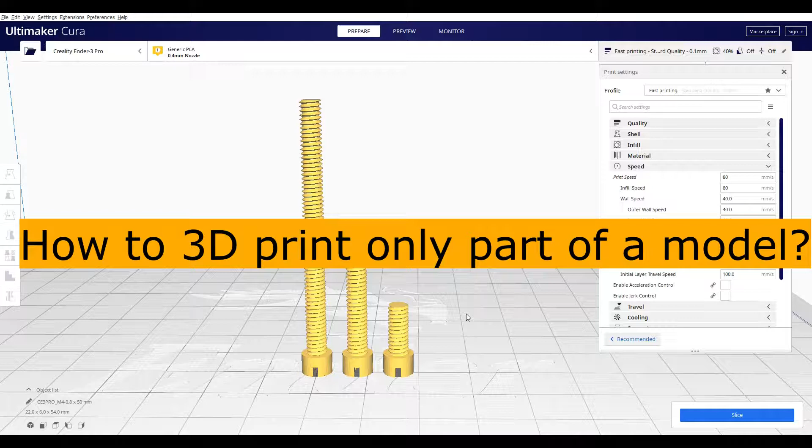How to 3D print only part of a model? I have this question so that I don't have to build a new model every time when I want to print a screw with just different lengths.

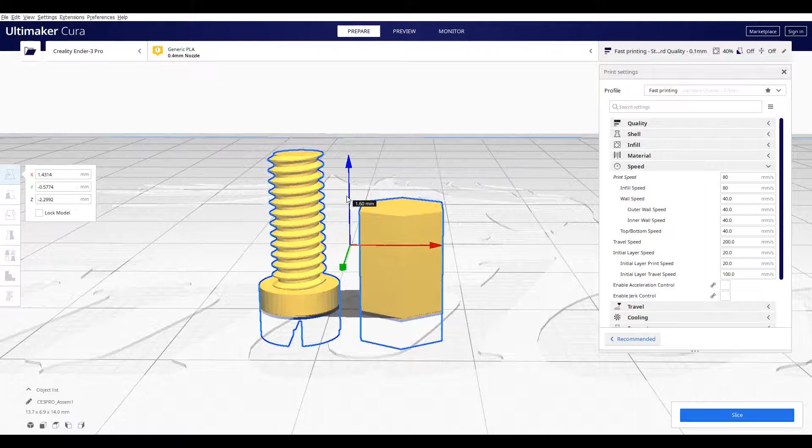And you may have the same question when you have a model that is too large to print, or when you have multiple parts in your STL file and you only want to print one part from it, or when you want to print a cross-sectional model, and you may have other reasons to ask the same question. I found a solution here using Ultimaker Cura to allow you to 3D print only part of a model.

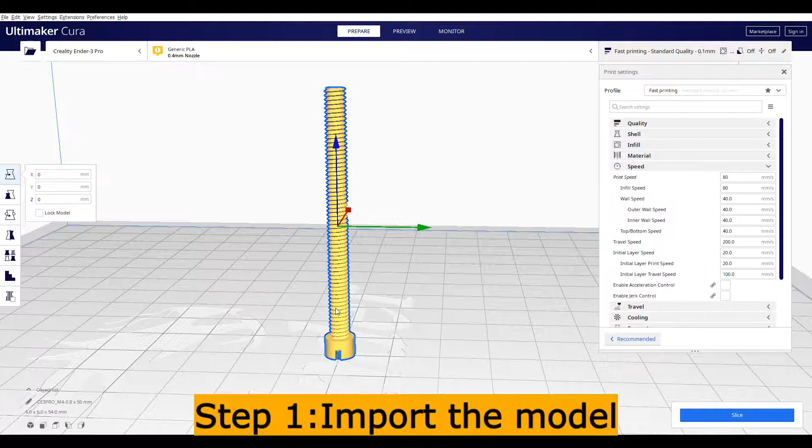Here is how we do it. Step 1, we import the model to the stage. Step 2, we add a support blocker using the support blocker tool. Step 3, we change the dimension of the support blocker. Here I set the Z dimension to 80 mm to cover the top area of the screw.

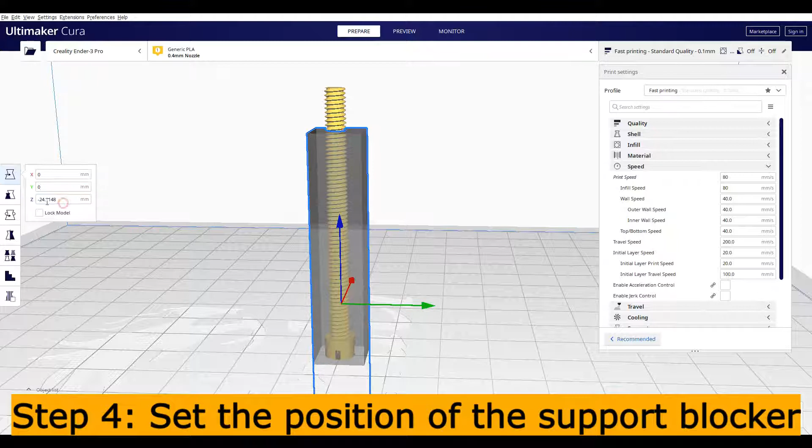Step 4, set the position of the support blocker. Here I set the X and Y position to 0 and the Z position to 10 mm. Step 5, change the per model setting. Select the option Modify settings for overlaps, and change the mesh type to cutting mesh.

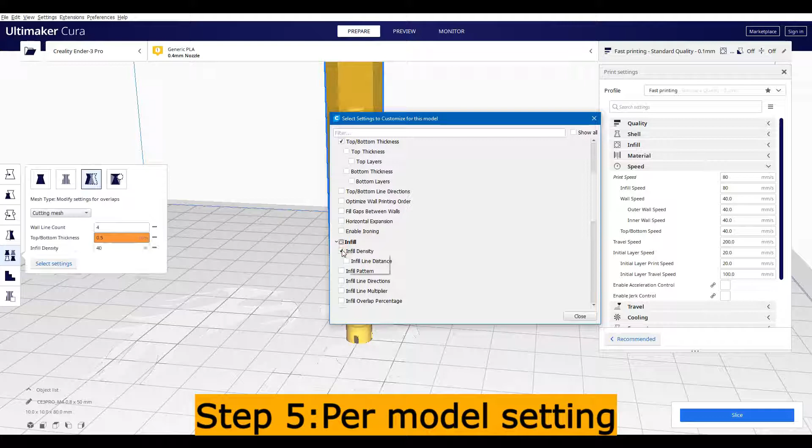Select settings, wall line count, top-bottom thickness, and infill density. Set all the 3 parameters to 0. Step 6, slice. Okay, now I can get a screw with a length of 10 mm from a model which has a length of 50 mm.

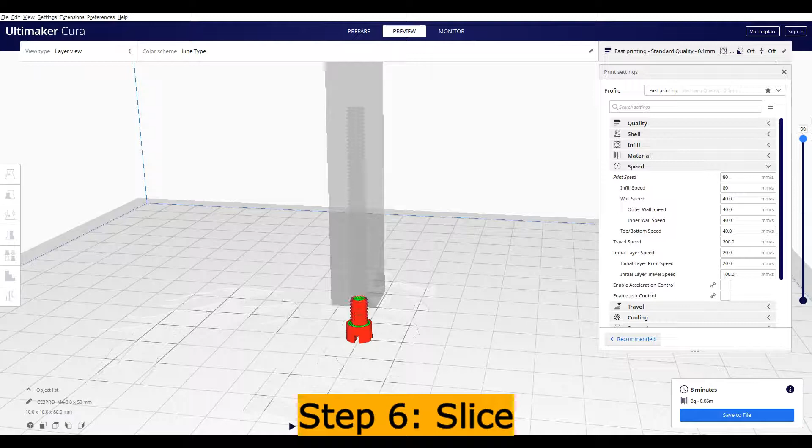That's it. The support blocker allows you to print only part of your model by blocking those parts that you don't need. Thank you.